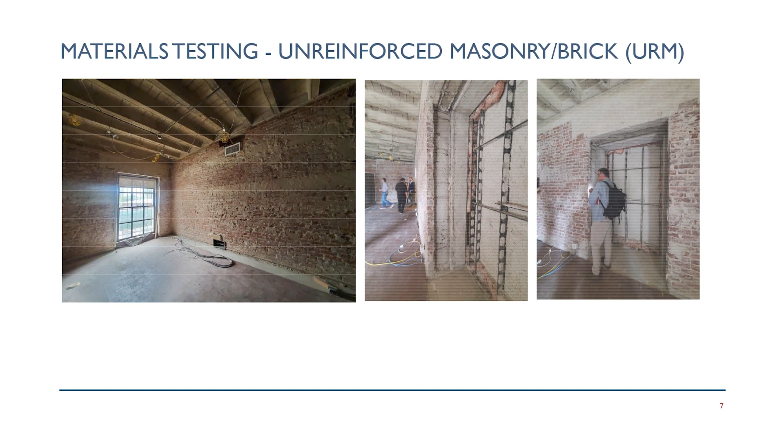So material testing was done — we didn't do this, but it was done prior to us getting there. They took off the finishes in one of the rooms to expose the unreinforced masonry, which is brick, to make sure that what we thought was there was actually there. They did testing in various places, not only in this room but in other spaces, to test the quality of the mortar and the brick itself, so we had as much data as we could.

Through the course of this we were now involved and working with our structural engineer. We looked at a variety of structural approaches to retrofit the building. I won't go through all the details of them, but there were a variety. I'm happy to discuss any of the details with the rest of you.

At the same time as we were looking at these approaches, we were also establishing the criteria, with the help of the Technical Oversight Committee and Public Works, to figure out what the right criteria for a building like this should be. It certainly had aspects in the structural code, but also historically — everything we did had to be done through a historic lens, so the building was able to be preserved in the architectural state that it is now, and that we want it to be.

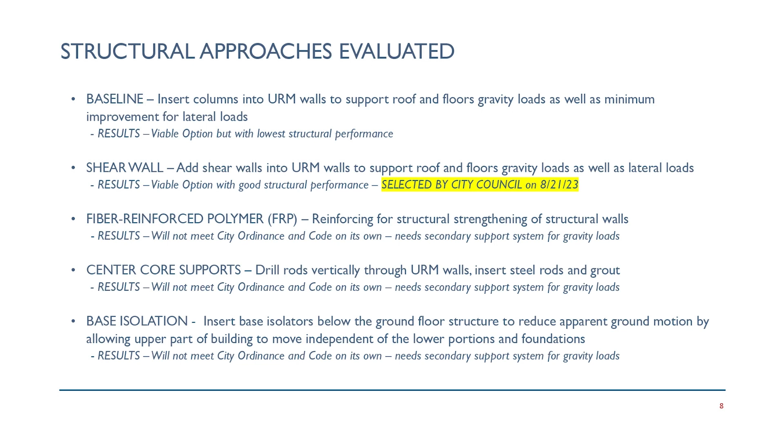The shear wall approach was selected by City Council. Part of our obligation was to go back to City Council with at least three approaches that would accomplish the goals, and they made a selection based on our recommendations that we should proceed with the shear wall approach. That was done last August, and after that we started on schematic design.

So what is the shear wall approach? The building is made up of parallel walls of brick. When we call it a wall of brick, that's actually three bricks wide on the tall walls, two bricks wide on the shorter walls, with an air gap, and then three more bricks wide. So it's very thick walls, about 36 inches overall in general, some closer to 24 inches wide. But the thing they have in common is this air gap, and I'm going to explain why that cavity is so important.

The air came out of that cavity, that air slot at the top of the wall, above where humans can walk. These are very tall walls, 40 feet high, and that air slot is at about 8 feet tall, so above your head. There's a return air slot down at the bottom.

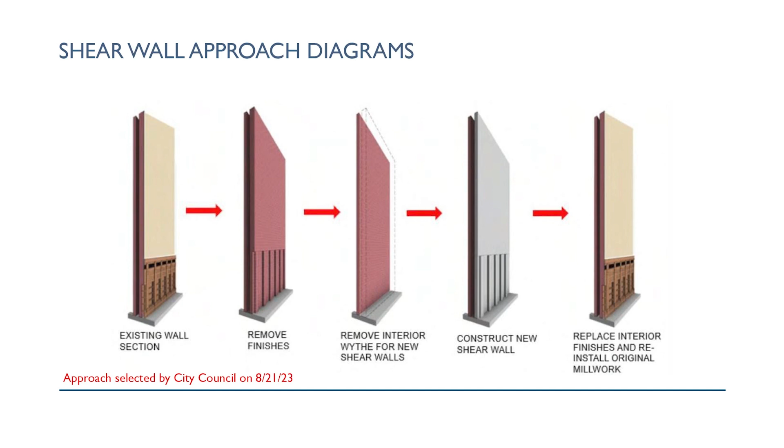When we're all done with that, we're going to put the finishes back on. We'll take all the wood and put it right back in place, and put new acoustic plaster. It was acoustic plaster originally—fascinating, since 100 years ago I didn't know they had acoustic plaster, but in fact they did.

We know this because we have a long 17-page letter from Myron Hunt telling us all the things that were important to his design. It was really tremendous. Over the years that plaster has been painted, so it's not acting acoustically anymore—with acoustic plaster you can't paint it because you clog up the holes. So when we replace it, we'll actually make it perform like it originally did.

One of the things that's really important here is that it's not just about a seismic upgrade. Seismic is what's the catalyst for this, but while we're at it, we want to take care of all the other things that are appropriate and important for this community and this building. So the goal can't only be seismic—if it was only seismic, we'd have one type of solution.

But this is a building that's historic. We must do this in the lens of historic preservation. This was actually the first building built in the Bennett Plan that started the Civic Center for Pasadena. So this is the most important civic building from that standpoint, and ultimately, historic preservation is critical.

But the building, built 100 years ago, they didn't know what accessibility was in the way that we do now. So there's stairs all over the place, and people who have any sort of mobility challenges have a hard time getting into this building. So it is important, legally, an obligation that we upgrade this building to make it more accessible so that people of all mobilities and abilities can equally use this building.

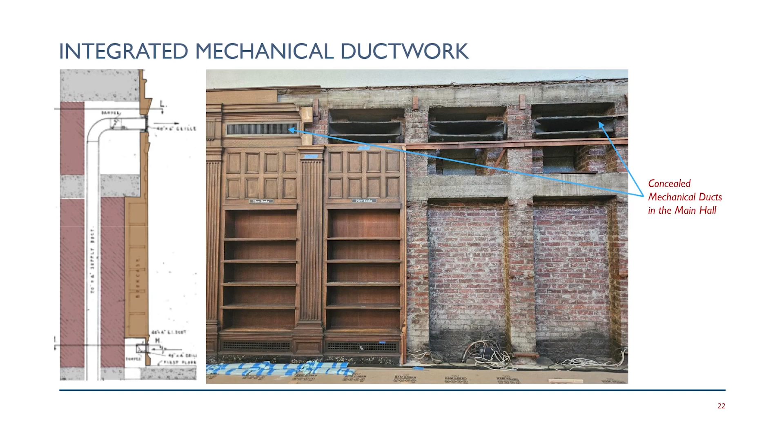What we saw when we first got on this project was that civic master plan that Deborah had mentioned, which used to have a strong connection with the south entrance. What we noticed was that with the addition of the parking lot, the north entrance became the main entrance, and it used to be the loading dock.

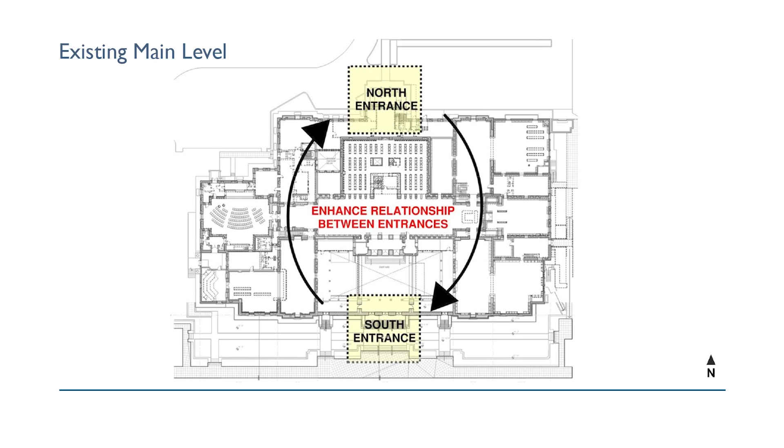So what we wanted to do is give back more of that south entry to the north entry, while maintaining both. This is the existing ground floor level that you're probably familiar with, with that large book stacks cube in the center. That was put in the 1980s. The stack levels, the actual volume of space, was already there from Myron Hunt.

What we found from the historic drawings, which is kind of like looking at treasure maps, was that Myron Hunt had intentions of putting stack levels into that space. So what they did in the 80s had been in line with those intentions, and we're also proposing to keep with those intentions, but at the same time recognize the importance of the north entry to the library.

So with this, we have highlighted the colored areas where we're proposing some kind of change. In what we're calling the circulation hall, which used to be the stacks, we're opening that area up to the Great Hall to give connection to the south entry. And we're taking that circulation desk, which had been the main point of entrance for the south but nobody could find from the north.

We're taking that desk and moving it into the circulation hall, in line with the axis of the north and south entries. I'll suggest you just toggle for a second here, because I think it's useful back and forth. So there's a big U-shaped wall right here in that area. Hopefully you can see my green cursor. That U-shaped wall currently keeps you from being able to see or walk all the way through the building.

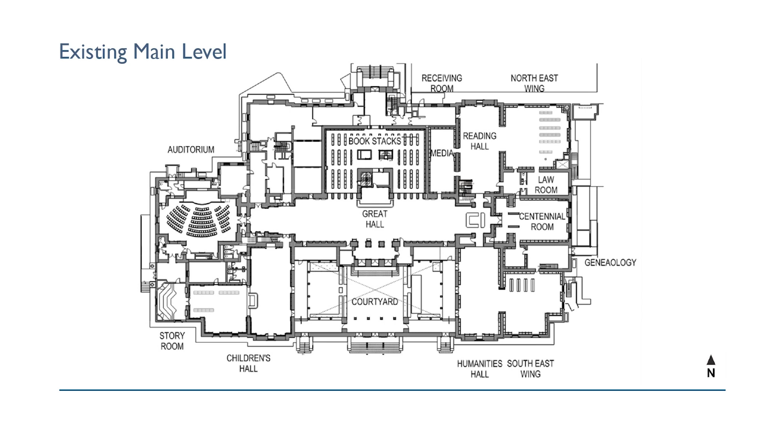So as Devin was talking about, coming in through the remade loading dock that's become the north entry, you wander through an area that's a bit of a maze, having to find your way around to get into the Great Hall. One of the things we're proposing is to remove that U-shaped shear wall so it's not a visual impediment anymore. So this is now opened up, and you can walk and see all the way through.

I'll just point out one more thing, which is this opening already exists — you just can't tell because that wall is in the way. We're not creating a new opening; that opening is already there.

In some of these other areas, we're adding — the northeast and southeast wings were actually 1960s additions. We're taking the feedback we've gotten about needing more meeting rooms and adding a lot more meeting rooms into the library, for private tutoring, meetings with lawyers, and a lot of other different needs that have come up.

We've also added a stronger bank of restrooms, and reimagined some of the back-of-house space for the library, talking with them a lot about how they function and how they need to be organized and be close to the circulation hall on the ground level. We'll also get into some upgrades to the auditorium.

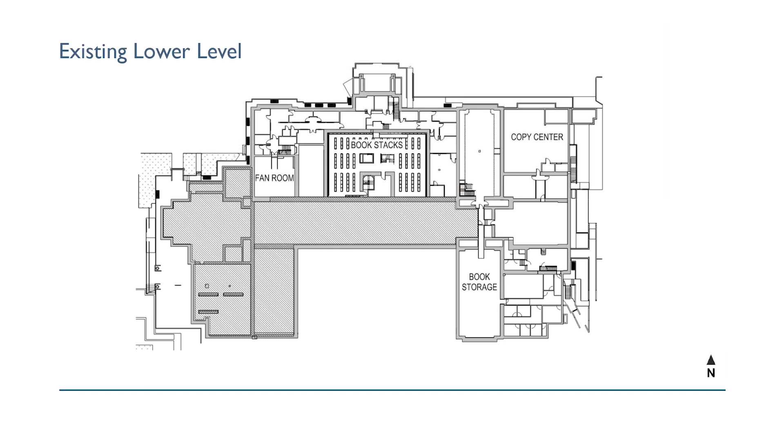Going downstairs now to the lower level — this area had really only been utilized for a computer center. So what we're trying to do with this area, and also the book stacks that were there — let me show you this picture. This shows all the different levels down there. There's not an easy way of getting around; I would not suggest going down there by yourself. There are many levels, and places you can't get to from one side to the other.

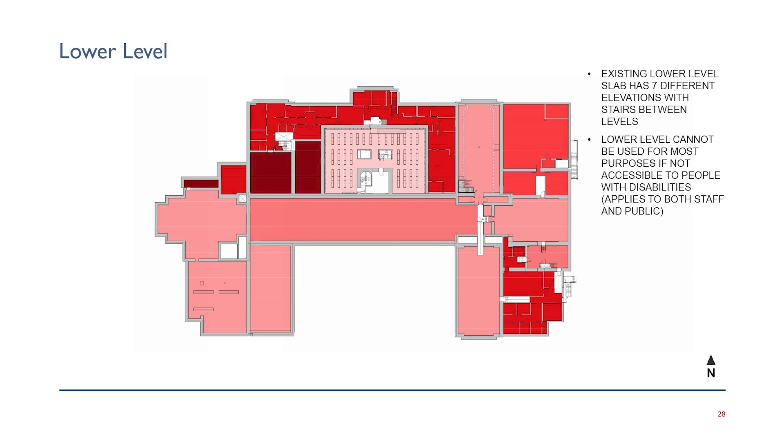Because we need to do structural upgrades to the foundation and the lower level, we're proposing to level out that floor to give this a much more usable space for the library and for some more community spaces down there.

So what you're seeing here, the blue areas and the circulation hall are the public spaces. And then the rest of this is utilized for the library staff.

So the circulation hall you would get to from that main circulation space that I was showing you, with stairs down, very open stairs, and we'll show you some pictures. And an elevator. We are proposing 2 new elevators. We're taking out the existing elevator in the stacks that was not code compliant and not gurney compliant.

And we're adding in 2 new elevators to help with access to the different levels of the stacks, and then also to the basement and lower level. And then this other elevator over here actually helps really well with getting access to the auditorium and backstage, and then also for library staff.

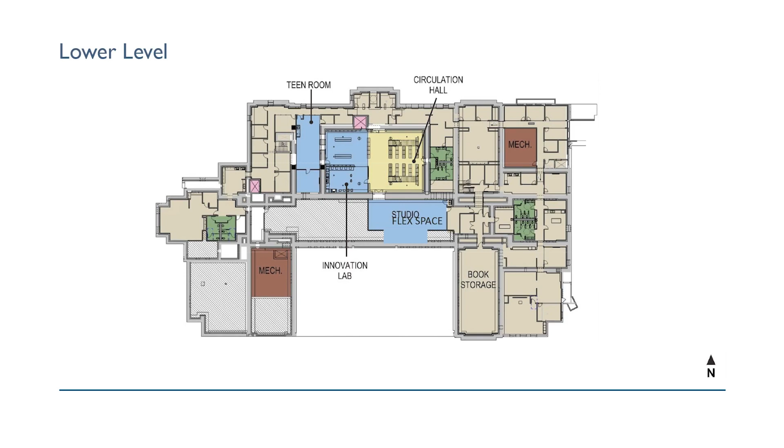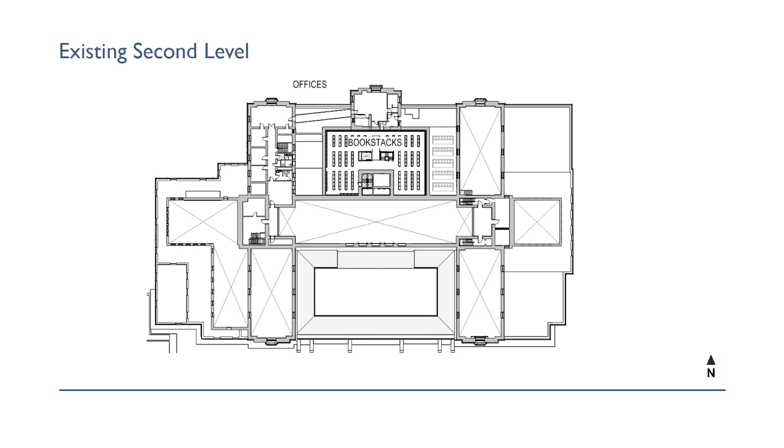Getting up now to the existing second level, it's mainly used with staff in some office areas up here, and then also what used to be a janitor's quarters off of the north side entrance, and then the book stacks. Our proposal here is to take that stack area, and this is the top upmost mezzanine level that we're going to be proposing, and that would also have access to that janitor's gallery, or what we're calling now a gallery space that could be used for public art, art shows, or artist in residency type thing.

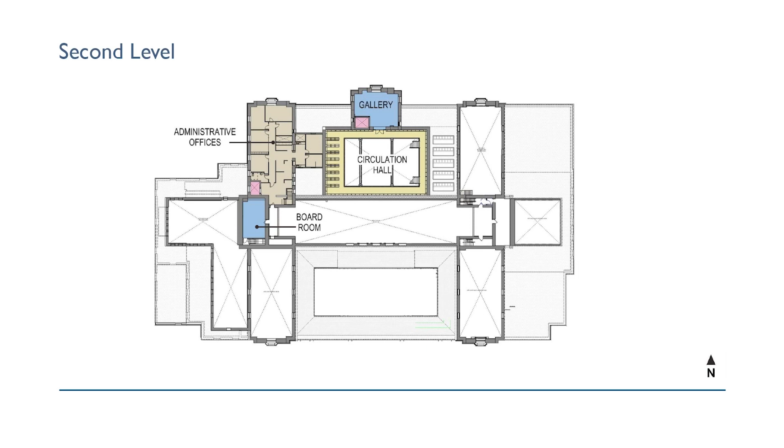Then we've relocated some of the administration offices over on this wing, and then we have access also to a boardroom area, or it's kind of just a really pretty boardroom or meeting room that could be reutilized, and I'll show you some pictures of that shortly.

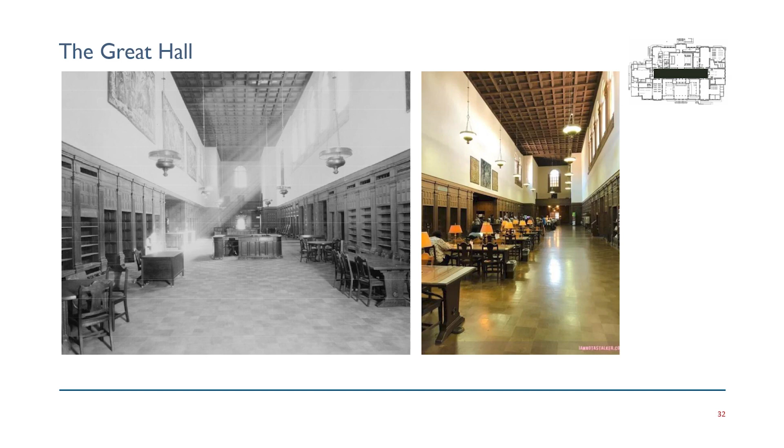And this will provide great visibility by the library staff for people coming in from the south and the north entry. And then also have a visible entrance, seeing people going down to the lower level where the innovation lab, multi-purpose flex space, and the teen center is.

Could you orient people where the parking lot is? Yes. So this area up here is north, directly north. So that's the parking lot area, just to make sure that's clear, and then this is the Great Hall down here, the lower level of the screen for.

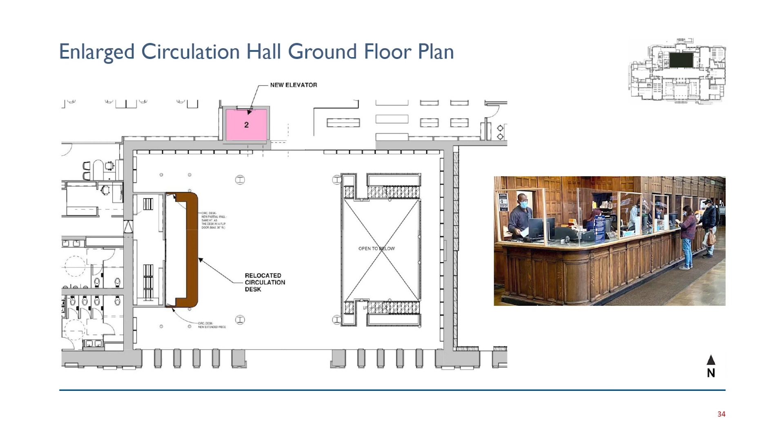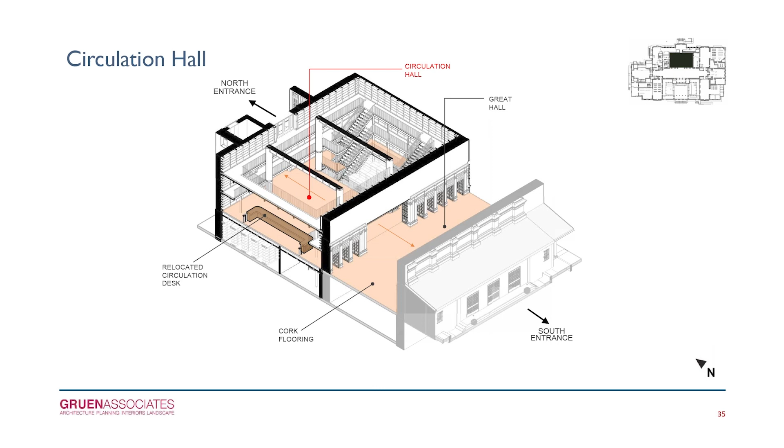And this is where we cut it off here are the doors to the gallery space. And this is showing also a peek down into the lower level of the stacks area as well. So we're taking advantage of a lot of the natural skylight, the existing skylights that are above on both of these sides. And we're opening up and making sure that there's light getting more infiltrated through here.

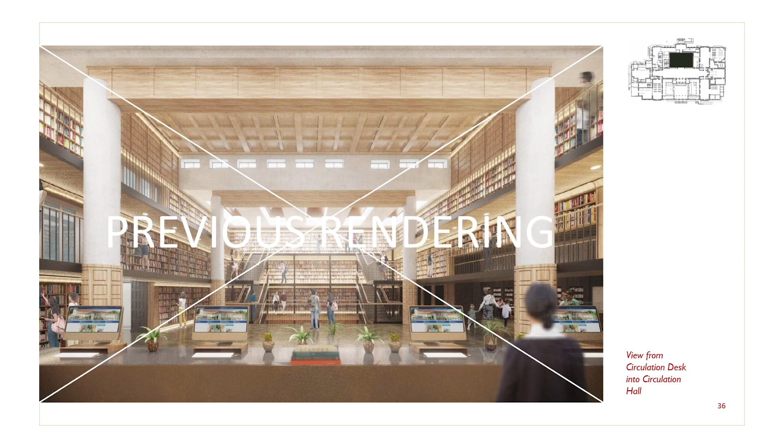What we wanted to show you with this is a rendering that we showed in December at the last community meeting that we had when we were developing the space and working with the finishes. And this was a lighter wood, and it didn't show well. So we have updated it to keep in with the stained darker oak wood that the library has, and to have more character in line with Myron's style.

And I just want to reiterate, we got feedback at that meeting, and we took it to heart. That's what we see the value of the feedback we get from you is - we want to make this the best building it can be and the building it should be. And so we need that feedback. So we got feedback saying, I like what you're doing, but that wood color's got to go. And the railings were not really meant to be exactly a design - they were kind of a placeholder, and we learned, don't do that. It's not a good idea to put a placeholder out at a community meeting. So we listened, and we are still developing.

So this is still a work in progress, and we still are looking for feedback. But we're trying to make it more of that historic character with the darker materials, the wood and metal combination.

And for those of you who are familiar with Myron Hunt's Huntington Library, you'll see that we're trying to borrow some of the nuance from what he did in that library, because we don't know what he would have done here because he didn't design it.

All that we have from him are indications of a future stack area with 4 levels and 2 stairs. So we are holding to 4 levels and 2 stairs, but different from what's there today.

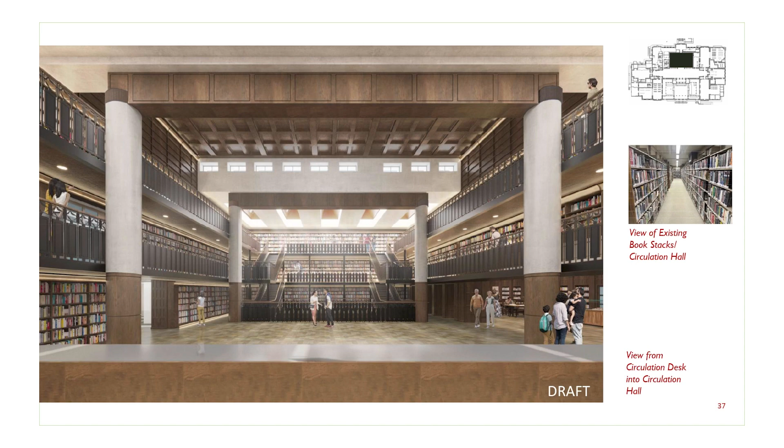So here are a few other views. And once, as Deborah said, again, we are still in design. These are renderings that we do as snapshots, but we are still working out details, proportions, sizes throughout this.

So this is looking from the circulation desk towards the east side. And you see the volume down into the lower level and those staircases going up.

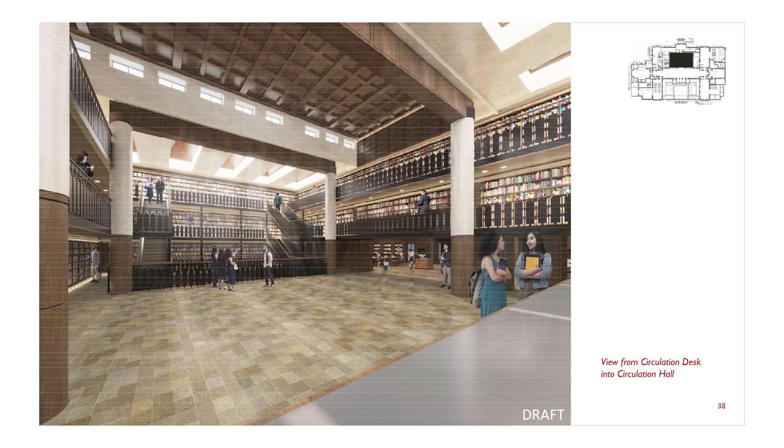So to the left-hand side is the north entry. To the right-hand side is the Great Hall. I'll be your Thomas guide here.

Once again, these are some renderings. We are doing this in a 3D model drawing, so we study everything in 3 dimensions. These are some of the snapshots that we can do from our model, and this is up on the top mezzanine, kind of looking down one of the pathways.

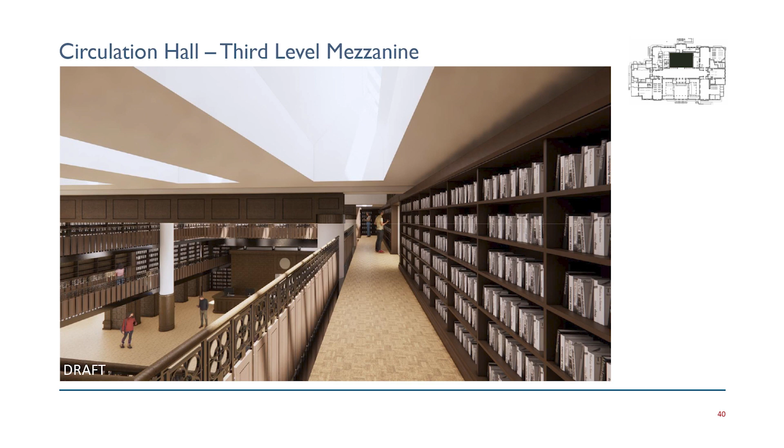And what we've heard a lot of the feedback is that we need to incorporate some seating spaces, some kind of pause spaces, so people don't have to walk too far when they decide that they don't want the stack of books and put them down on the floor. So we're going to work some of that into this, specifically from feedback that we've continued to get.

This is that boardroom, or we call it a boardroom, but it is a meeting room for the public that can be rented out. But what we found from the historic drawings was Myron Hunt had on this west end this beautiful space with the arched ceiling and the windows existing, currently in the 80s it was added in with a third level.

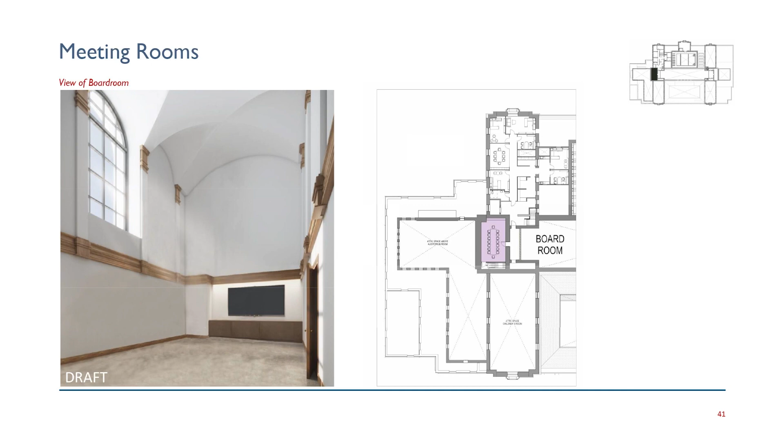We can't utilize that. We can't get in an elevator without taking out a lot of space and then also interrupting the Great Hall below. So we're proposing to take that out, which we need to anyway for structural purposes and reinforcement of the walls, and then recreate this back to what it was in Myron Hunt's time, and then use this as a meeting room for the public. This is the largest meeting room.

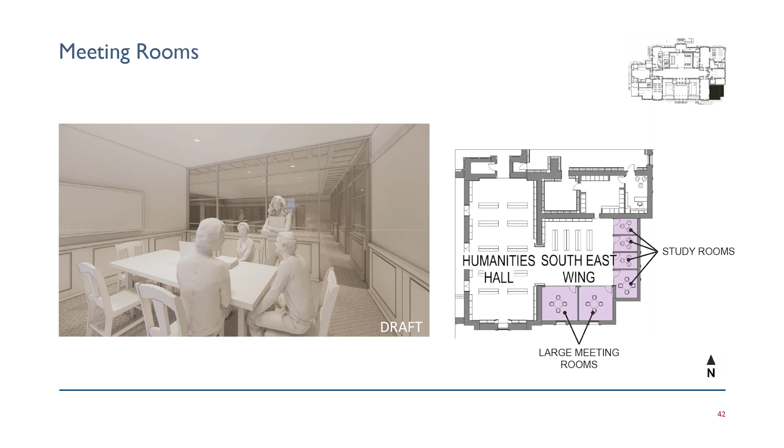Other meeting rooms that we have in the southeast wing are meant to have multiple levels of different size groups that can meet and still have a sense of visibility for the library staff. We're constantly weighing out what the public wants and how the library can work with that, so we're always marrying up those two ideas.

Other flexible spaces: we have the Innovation Lab, which had been on the ground level before, and we're reintroducing it down in the lower level. We also have a flex space or multi-purpose studio space that can be used for a multitude of functions, same within the Great Hall. From some of the pictures earlier, I'm sure most of you have been to many of the functions at the library, where maybe it was the One City, One Story event, and the Great Hall is utilized and the courtyard can be utilized for events.

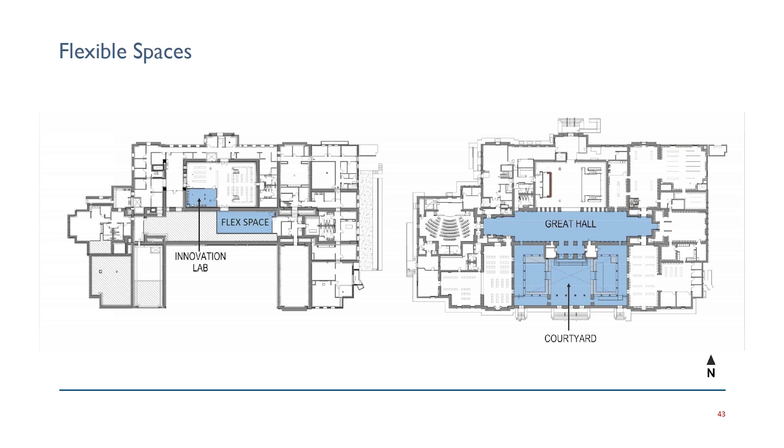Accessibility is a big key thing for us, and we've been studying it pretty extensively on how people get into the south entrance. We've been studying this not only from the accessibility code standpoint, but also from a historic standpoint, not disturbing too much of that entrance and not making it feel overpowering. We're doing this with sloped walkways, which are much more gradual than a ramp and don't need all the handrails and guardrails, and we're also introducing one in the courtyard.

And then I mentioned the elevators earlier. We're also doing one in a chairlift for the stage in the auditorium.

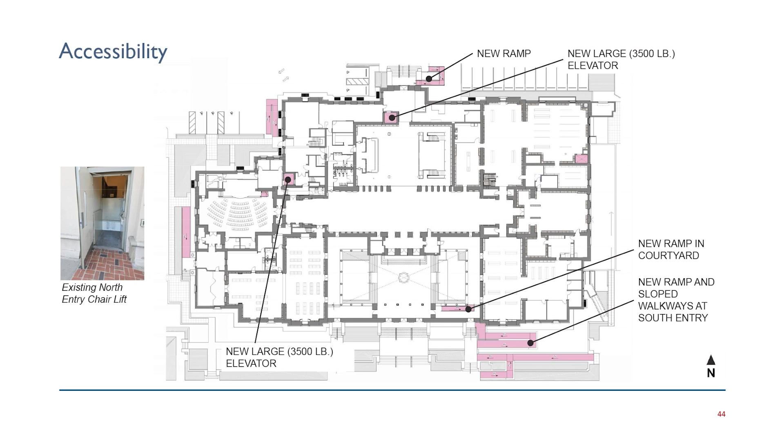So here's diving into a little bit of the auditorium. The existing auditorium just did not have a lot of the standard backstage functions for a stage and support accessory rooms. What we're doing, we're providing a piano storage room for the Tuesday Musicale, for the two grand pianos that the library has, and then we're adding in green rooms and dressing rooms.

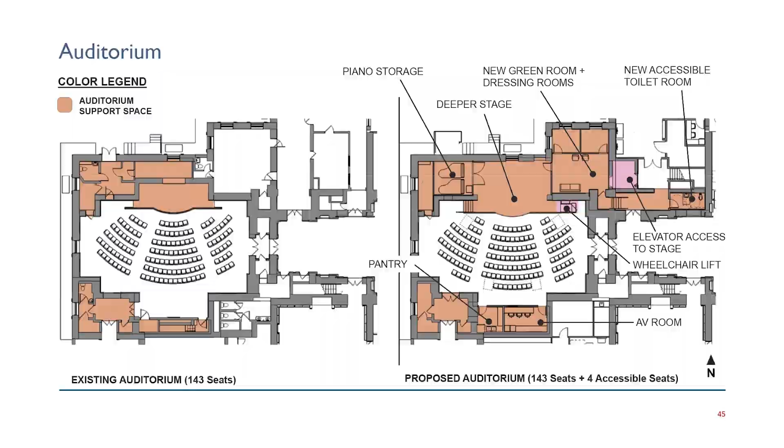This was the elevator I talked about earlier, so we have easy backstage access for somebody in a wheelchair, and then also access to a toilet, and a chairlift to the stage. The seating count is being rearranged, but the count is staying the same, with 4 additional accessible wheelchair spaces, and a better AV room, so a proper AV room, and a better pantry.

So we are hearing loud and clear that those are important.

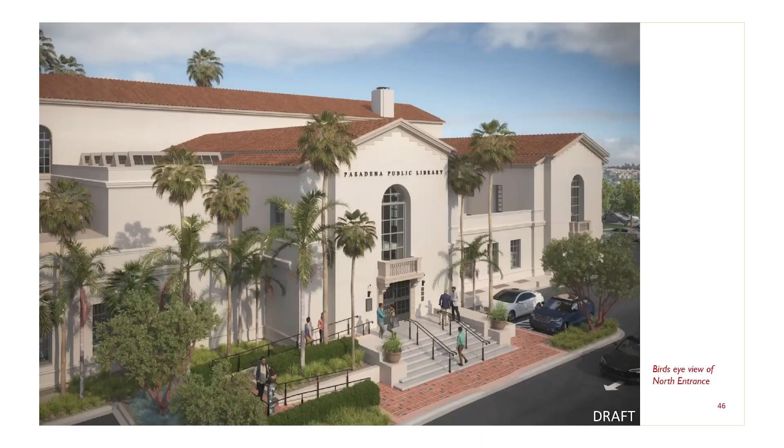Also on the north entry, we're updating the accessible ramp into the north entrance. There had been a ramp and a chairlift that's not per current code now. What we want to do is have the same place where somebody goes up the steps also be the same place where somebody with a wheelchair might need to use the ramp, so they start and stop at the same spot. That's more equal access than going over that way, and I'll see you inside somewhere.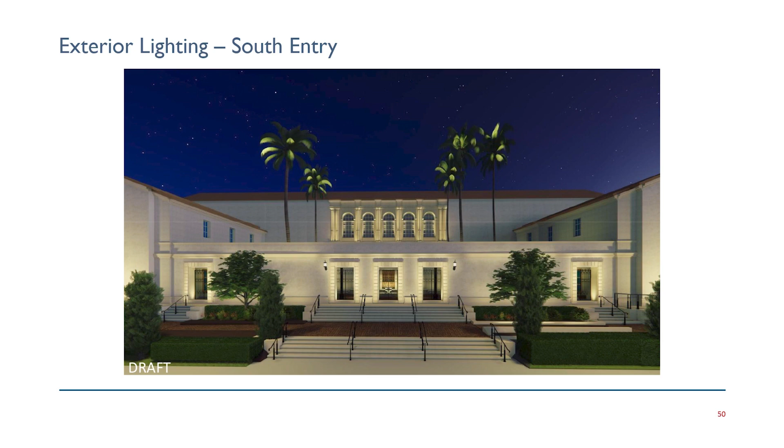This is an overall view. Once again, not changing much on the exterior, but making it more accessible, and then updating the night lighting. You notice the City Hall has beautiful nighttime lighting, and this would also put that in character and create that nice axial symmetry in the evening for events.

So the last part here is talking about how we're landscaping. Devin showed you some images of the front; it's cleaned up from what it is, but we're maintaining that. Myron Hunt wanted there to be hedges concealing walls in front of the building, and so there are walls there now that you don't see because there's a hedge there. We're maintaining that, we're cleaning it up. There is a fair amount of turf, and we're trying to do a little better on water use and maintenance by replacing that with better, more appropriate planting, but still maintaining its character.

These are all the principles that are really encompassing all of the landscaping, whether it's in the courtyard, in front of the building, or in a new area that we're developing. It wants to have a historic character, a civic character, but these other principles of being pollinator friendly and resilient are appropriate to landscape today and can be done in a manner that's compatible with the historic nature of the building. So just for an overview of these areas: we have the north entry, what we're calling Library Park, and then the courtyard and the south entry.

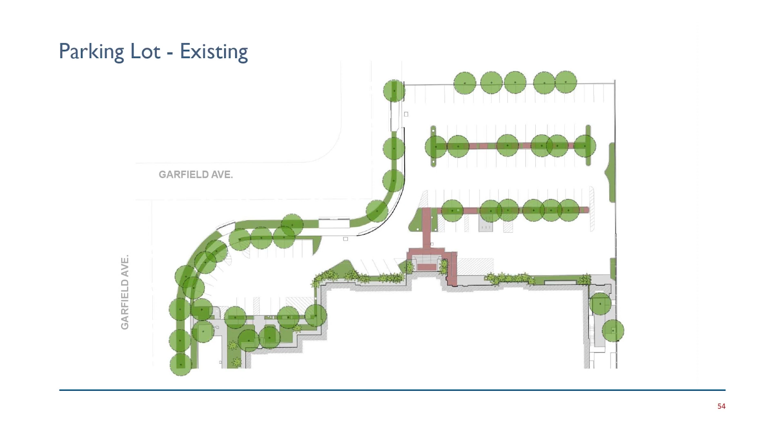So we're rearranging it. The number of spaces doesn't change, it doesn't grow or shrink, but it gets better. We're making the spaces the proper size and the drive aisles the proper width, and we're accomplishing this with one-way traffic so cars aren't trying to pass each other in the aisles. On the perimeter there's two-way traffic, but for the bulk of the parking it's one-way, which we think provides much better intuitive wayfinding.

The diagonal parking spaces are easier for most people to get in and out of. We strongly believe this will ease many of the problems with using the lot. With diagonal parking and proper drive aisles, people can get in and out of spaces without taking up two spaces—they tend to use just the one space they need. So while we may not increase the number of stalls, they'll be properly utilized.

We've also reconfigured and relocated the accessible parking so it's proximate to both entries. Over here, this is close to the north entry, so you can easily reach the ramp Devin showed you. This section, even though it's a long way from the south entry, serves the south entry. It's really important we don't forget that people can enter through the north or south entry, so we want to make sure we're accommodating both.

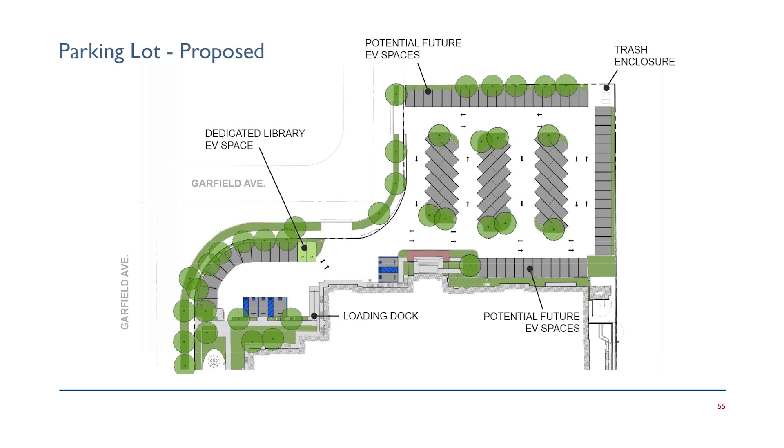I mentioned we have a new little library park with existing olive trees—those aren't going anywhere, we're maintaining and protecting them. But around them, we're taking advantage of the space, which is actually fairly sizable. We're trying to reconfigure it into a park with a purpose, with some dedicated areas. It's directly adjacent to the children's area, so we envision outdoor reading opportunities for the children's room, of course controlled by an adult taking the children outside, but that proximity is really beneficial.

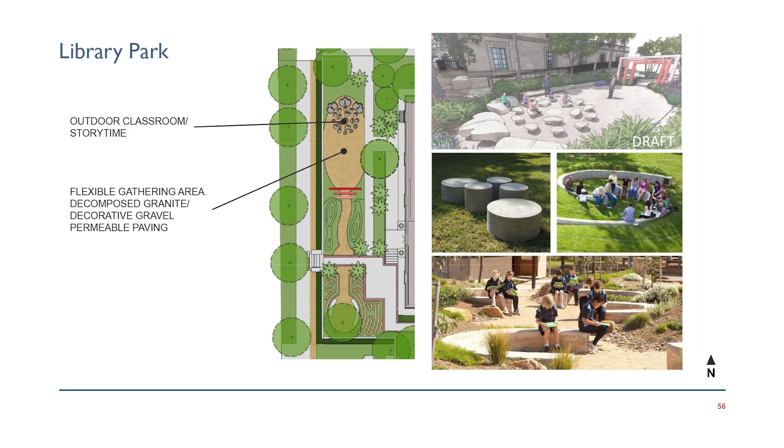We could go into more detail, but I'm conscious of time, so I'll move on. Anyone with questions about this can certainly ask.

Now for the next steps. We've completed schematic design and went back to City Council to show them what we'd done—they were pretty pleased, I think it's fair to say. Now we're in what we call design development, and we're midway through that. We're also making sure all the budgeted costs are being maintained within our design, so we're preparing cost estimates to validate that the design stays within budget.

Following completion of design development, we'll roll into 100% plans, otherwise known as construction documents, plan check, bid, and so on. Hopefully we'll be in construction by the third quarter of 2025, with completion about three years later. So with that, thank you for listening.

And yes? I saw on the image that there were stacks along the perimeter on the third floor mezzanine. Yeah, that was visible. Could you point out—I'm very conscious of our modern 21st century emphasis on all the other wonderful things you guys are creating, technology, meeting space, presentations...

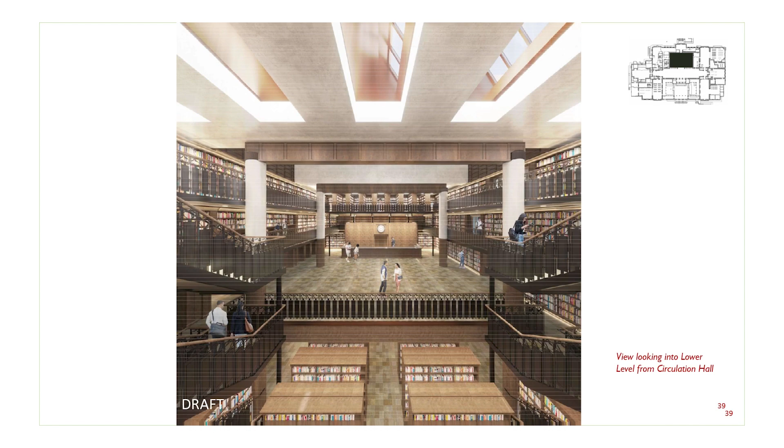One of the reasons Devin pointed out that we need to put in some respite areas where people can sit and read a book or browse what they've pulled off the shelf, not just have all books. This is the main stack area, but we have stacks in every hall in this building, built in all the way around. Part of this approach where we take them out and put them back in is maintaining all of those stacks. In some rooms there are also freestanding stacks.

Devin mentioned, and we talked about this in greater detail in prior presentations - we're trying to move on to new information so we didn't show quite the same thing this time. But in the 60s, two big wings were built, and those are not historic. In those two wings, we're taking advantage of their non-historic nature and putting even more freestanding stacks in, so that we maintain the right amount of stacks in the building for all the volumes and elements we need.

We've gone through a very detailed process with Tim's staff to understand what those volumes are, how big they are, how much space they take up. But that's just a numbers game if you look at it that way. We have to go to a whole other level of mental exercise and figure out how many of each type there is, because you don't want fiction mixed with nonfiction - you want it to be very cohesive. So it's really trying to figure out how big each section is and where they appropriately can or should reside. That's been quite a fun puzzle, and I think we got to the right place for that.

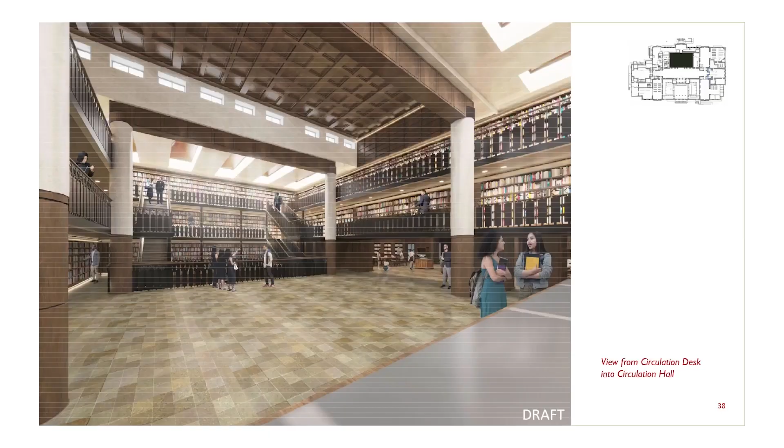These clerestory windows are there. So it's just one of these things that when we take out all the stuff concealing them from view, we suddenly get to see them. We think the quality of light will be great. They're north facing, a little sloped, so not perfect, but pretty darn good. North facing light is a really good quality of light. We think it's going to be really great, and we hope you do too.

So, yes. Hi, so at the last meeting you said the current estimate was $200 million. 195. And then I heard you mentioning today cost overruns. No.

I read that the fees for architects are usually like 20 to 30% of whatever the total bill is. No, I wish. As an architect, I would love that client.

So I have a bad feeling that a lot of these are just running up the bill, because these are not problems that we have. We just need the earthquake retrofit. And this reimagining of 4 levels and taking out the basement, that's something that should be planned over 20 years, not as a sort of creating a sense of urgency that it needs to be done. That should be planned over 20 years.

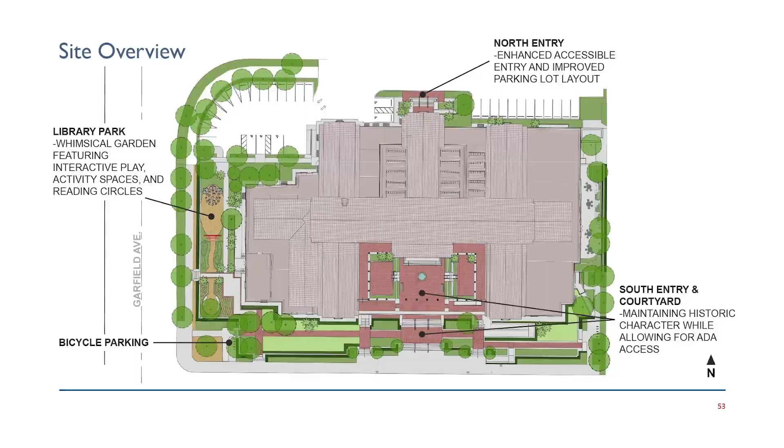There are some challenges. Those two rooms on the side - one was the adult reading room on the east, the children's reading room on the west. They're at the level of the inside of the building, more or less. The one down below is lower, and you need steps to get there. So there are some accessibility challenges in the courtyard. We're figuring them out so all three rooms can be well used. We're doing one thing we hope Myron won't criticize us too much for - our historic consultant has blessed this as acceptable - we're connecting them so you can go from one room to another in a more fluid manner. Because the reality is they haven't been used as the strict reading rooms they were for a long time. They used to be fenced off, so you couldn't go from one to the other. It's just not the way people are using that space, but it will still be used for an outdoor reading space, with greater flexibility than that. So sorry for a long-winded answer to a question.

Let me get to this woman, and then you'll be next. Yes, hi, thank you for your presentation.

I wanted to see if anybody had considered having solar panels in the parking lot. Yes, we don't have the budget for them. What about water and power, can't you persuade them? We continue to talk about all the clever ways we can get someone else to put solar panels in the parking lot. We think it would be ideal. It's a budget consideration, but we're trying to make sure not to preclude them being added. So we're looking at it as something that can be done in the future, but we just can't afford to do it right now, for various, maybe obvious reasons. Thank you for pointing out another thing we didn't mention.

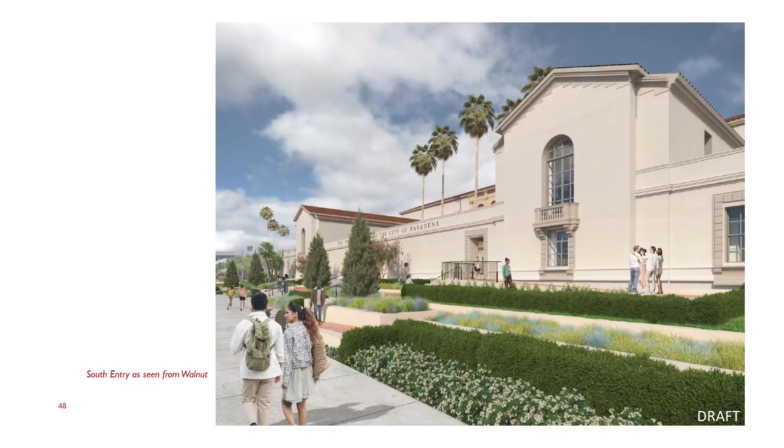So it's down here, and there's a nice area for bicycle parking. Okay, and it was there. And the other thing, there we go. All right, oops. The other thing was EV parking. Yeah, all right, so here's your bicycles, just before I go off.

With EV parking, people park there and just charge their vehicles, and they don't come and go. I think I've had a running commentary with Tim about the fact that he really should charge for the charging, because otherwise people just charge their car all day. That means that if the lot's kind of full, you can't park there.

I understand, that's more of a discussion for the library and Public Works to come to. Yeah, go ahead. We don't know exactly how many there will be, but we will have some EV charging spots in the library for sure. They will be occupied, and there will be some type of regulation and enforcement for how long you can be there. Exactly what it will be, or whether there's a cost to it, we don't know yet, but you're absolutely right, we need to address that. Thanks for bringing that up.

Hi, I have a broad point question and then a more specific one. One of the things that's always been grand about the south entry and a couple other spaces in the library has been the display cases, and they have served as points of public history. We would have a variety of communities, affiliations, affinity groups that would have a chance to have things up there, and it was really important because we would see cross communities. It was an opportunity to share where people would have similar experiences. So I'm hoping that those three spaces in some way or the other are going to be connected.

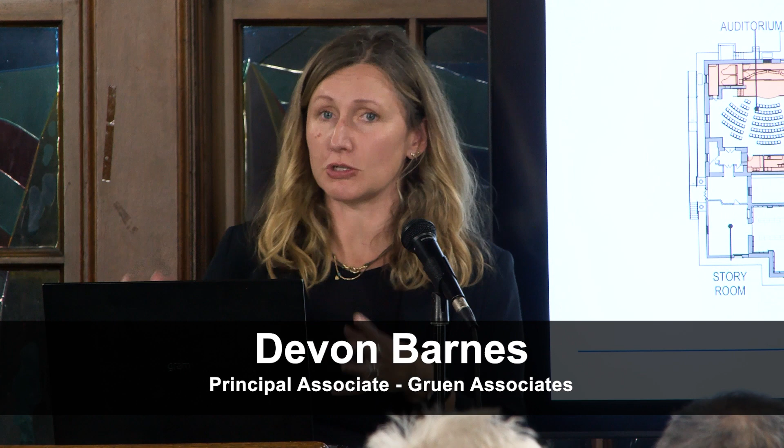We've been working with the library group pretty extensively behind the scenes about what needs they have. We haven't heard much from the community specifically on that, but we can do a lot of things in the children's hall with furniture - different furniture, different setups, different locations. That's kind of been some of our focus. It's not really something we're showing here, but that's great to note, and we're glad there's interest. We've also been working on the lactation room and the specific restrooms for that area.

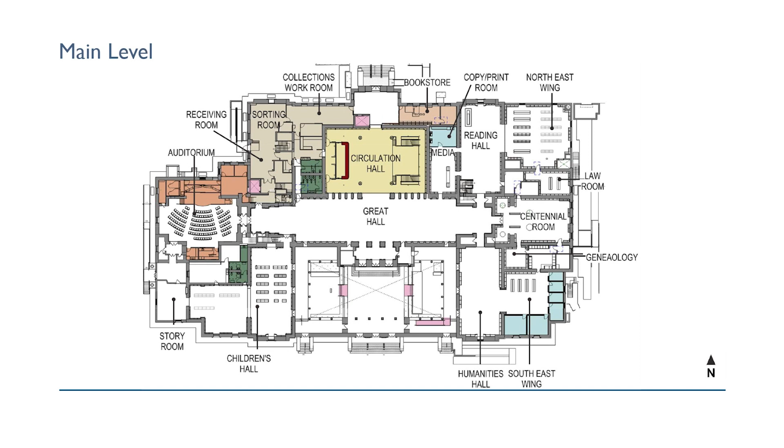Thank you. We do have what we have in the courtyard. We now have a ramp, so we know that stroller parking is an issue. We haven't designed anything inside the building. We've been looking at more access for strollers into the building, but not necessarily parking anywhere. So it's still planned for outside or in one of the courtyard areas.

Hi, my name is Lon Bender. I serve on the Commission for Urban Forestry and Parks and Recreation as well. We have a fiduciary duty, I think, to our constituents to look to native planting. You mentioned a park area, native habitat and native plantings. We're trying to not bring in species that are far afield.

It's a great opportunity to show off the native habitat in terms of the species we use for public spaces like this. We're in talks with Norton Simon - they're working on their project as well, and we're trying to get them also to create a native habitat. It's an opportunity for kids coming to the library - they'll have the kids space you're saying, but also the outside experience. You showed kids outside, and if it's essentially going to be a park, it's a great opportunity to give them education about native habitat, species, and the animals that will come to those trees, plants and shrubs. We have great experts here in town, and we get to interact with UFAC and potentially Parks and Rec and some of the staff to make that happen.

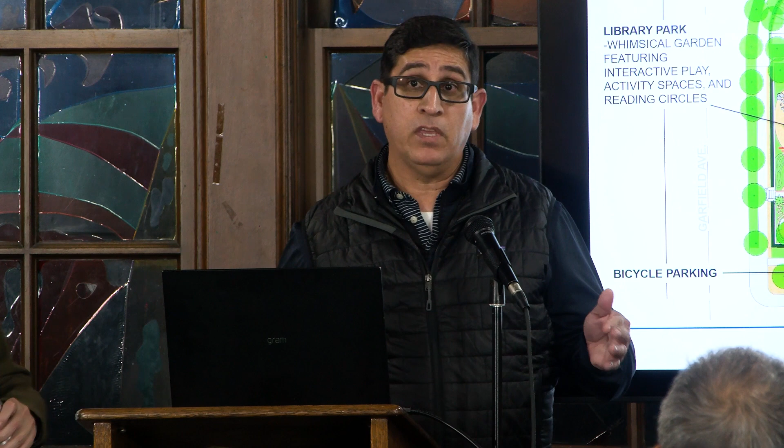Good evening, Senior Project Manager Teo Sierra. I am with Public Works, so I am actually currently managing the design and construction of this project. That is a very good question in terms of security, because for the past three weeks we've actually been addressing some of those concerns. We have scheduled meetings, not just with our library staff, but now also involving PD. So in the next couple of weeks we are scheduling meetings to go over an overview of what is going to be required in terms of the cameras and how the system is going to work - the type of views we're going to put in, the cameras we're going to use, the type of system that is going to be recording. All that stuff is going to be vetted in the next 2 to 3 weeks.

We are actually using the consultants that Gruen has as well, in order to provide the support system that is required, because there's a lot of equipment required to have cameras - it's not just the camera that is taping, there's a lot of information that is actually being captured through that. So stand by, I would say in the next month or so we will have more information in terms of how the system is going to integrate with PD.

It's comforting to know that you're addressing all of this and looking forward to it. We are - it's a sensitive topic, and nobody wants to talk about it, but we have to. If you address the same question with Pasadena Police, they will probably tell you the same thing, that we are in the works, because this is a subject that has come up in the past for parks and for other entities. So I think this is something that we're moving forward on pretty quickly as well. Thank you very much. Sure, yeah, it's a great question.

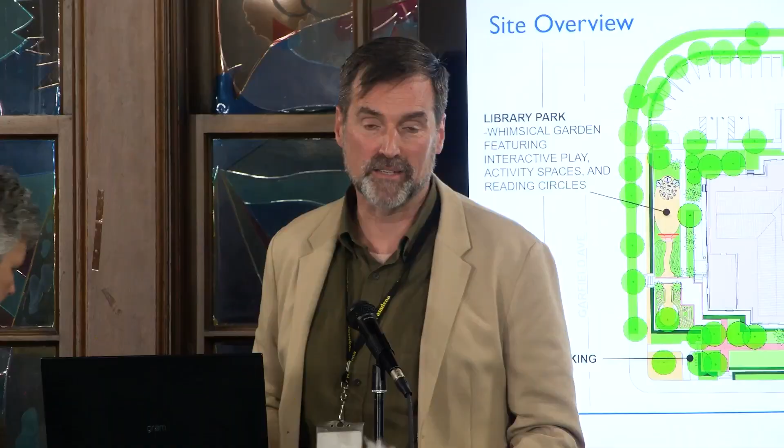This really was the genesis of the project: making the building more safe. So every step of the way we're addressing those questions. We talked about camera surveillance and fire suppression. We didn't talk too much about egress, but that's a big part of it too, making sure that wherever you are in the library, you're not cornered, that there's a way out. Deborah's heard me make that comment a lot, like how are we addressing the safest way out of the building? So those conversations are happening.

For the architects in the room, 2 ways out of all the rooms that need it. Or more.

There's the children's room on this side, the entrance, and then an adult room area. The lighting in there is really beautiful. Are you going to keep that lighting, just the setup the way it was? It's very calming. I think the answer is yes, but let me make sure I understand what you're talking about. You mean in the humanities hall? Because you walk in the doors, and the ambiance in there is just very nice to read. I think you're talking about this room right here. Yes, I am. It's going to stay the same? Yes, oh yes. Thank you very much.

I love everything you've presented in terms of the actual building and the use, reimagining or taking it back to some of the basic design. So forgive this terrible question, but parking, guys—are you working with the city, and this may be more for Tim—is there any give on the parking? Because this is going to be an even greater draw.

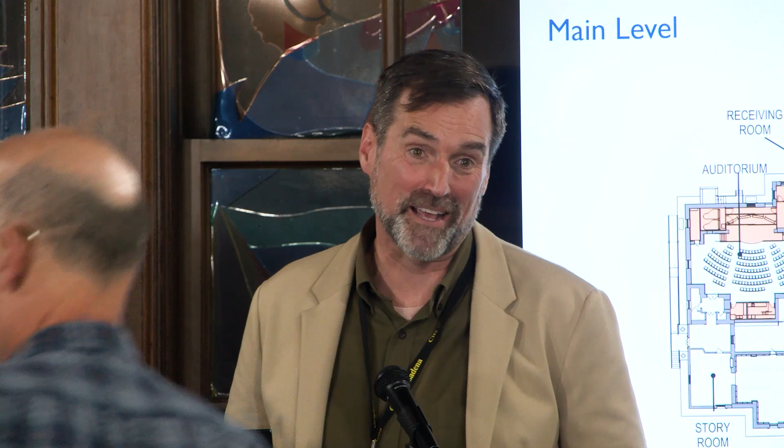It's expensive, is the short answer, but we will try to address it as best we can. I love the improvements to the flow in the parking lot that are being proposed—it will stop people from taking 2 spots instead of 1, which happens so often. We're looking at different options. Specifically, immediately to the north of Central Library, there's an 8-story building that used to be the University of Phoenix. Their garage has some city-owned spaces in it that we could potentially leverage. Other things too we're looking at, but you're right, having a net number of parking spaces doesn't move us ahead. Yeah, but I hear you.

For those that didn't hear: there's a 1-story building to the east of the Central Library with a big for-lease sign on it, and has been since I've lived in California. Our city real estate manager has reached out to the owner of that property on multiple occasions, and the price is out of range right now for the city, but we'll keep returning to that. It may be a solution in the future, but to date it hasn't been—it's just been too expensive.

Other questions? I'm mindful of the hour and really appreciate your attention and all of the feedback that we've gotten. It's really been fantastic.